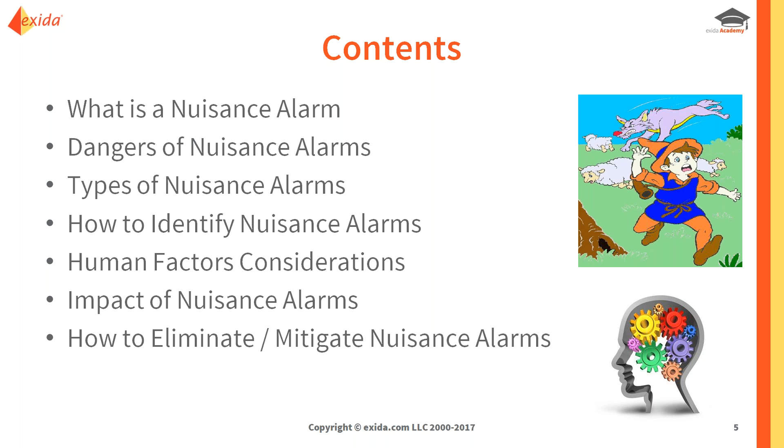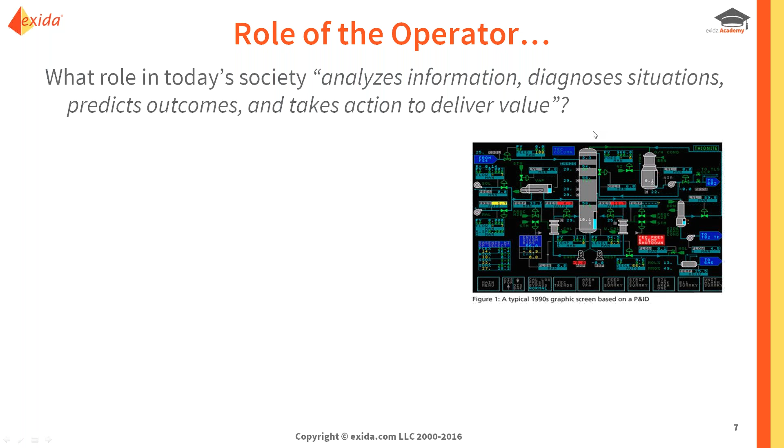On that note, we'll get started with a quiz question. I want you to think about what role in today's society analyzes information, diagnoses situations, predicts outcomes, and takes action to deliver value. Is it A, an airline pilot, B, a doctor, C, an air traffic controller, D, an operator, or E, all of the above?

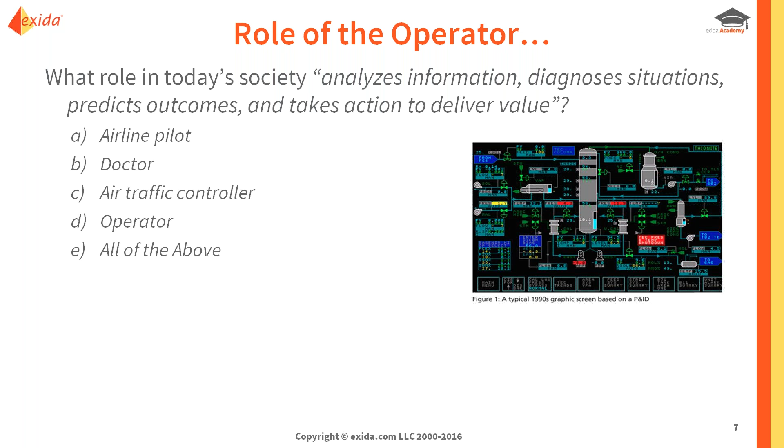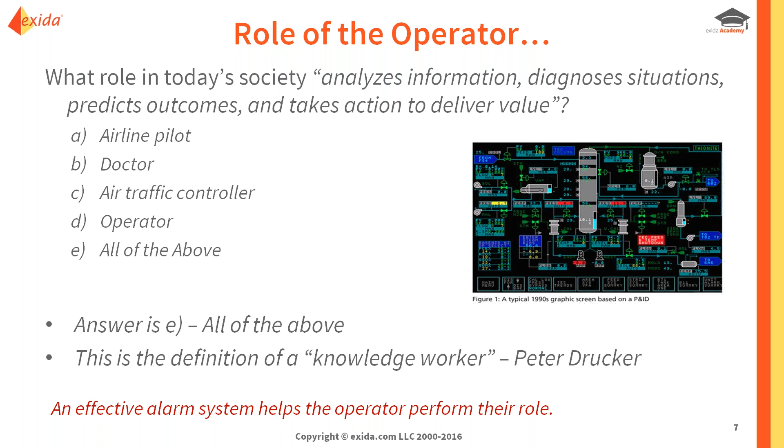As you can probably imagine, this was not really a serious question, but what I wanted you to realize is operators are similar in what they do and what they need to do as airline pilots, doctors, and air traffic controllers, in that they take in a lot of information and need to make quick decisions that may have significant impact on the operation of your plant. So they need to make quick decisions, and obviously they need the best information available to help them make those decisions. Having an effective alarm system working is key to helping them perform their role effectively.

Alarm system and alarms in particular. So let's look at what an alarm is actually supposed to do.

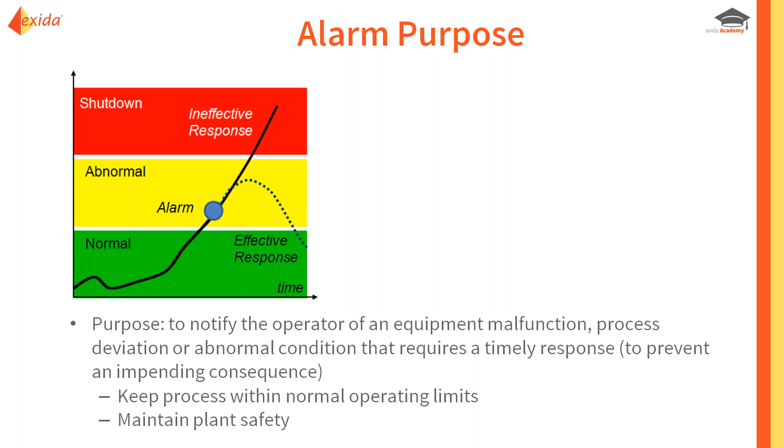But one of the key things was to see that when the alarm occurs and the operator responds, the situation will change and it will correct itself.

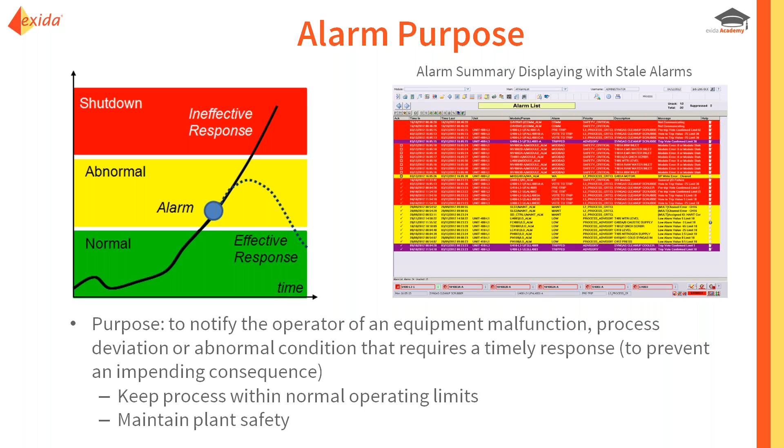So now if we look at a real-life operating plant where the operator's alarm summary display is full of alarms, and those alarms have been there a long time, days, weeks, months, we say those alarms that are on there, called stale alarms, are obviously not following the purpose we just talked about, which was: alarm occurs, operator responds, situation corrects itself, and the alarm clears. So these are examples of nuisance alarms, and there's something about them that they are not following what an alarm is supposed to be.

In other webinars, we've talked about the most common alarm management issues and how they impact operator performance. In this webinar, we're just going to focus on a subset of them, the nuisance alarms. So we'll look at chattering alarms, standing stale alarms, bad actors, and redundant alarms.

So we've been talking about a nuisance alarm, but let's define what it is. Everyone has kind of a general concept of what it would be, but let's look at the actual definition. A nuisance alarm is an alarm that annunciates excessively, unnecessarily, or does not return to normal after the correct response is taken. So what does that mean?

That means that, let's say we put in a new alarm into our system, and that alarm occurs, and the operator, if they've been trained on how to respond to it, which they should have been, will respond appropriately and take the corrective action and watch to see whether the alarm clears. Well, what if the alarm doesn't clear and that alarm just stays there and doesn't go away, but nothing happens? That would be an example of a nuisance alarm.

Well, what's going to happen the second time that alarm occurs? Is the operator going to respond the same way? Probably they will the second time, but how about the third and the fourth time? After a while, they will realize that it doesn't matter whether they respond or not. It doesn't make a difference. No consequence will occur. Nothing is happening different in the process. So thus the nuisance alarm.

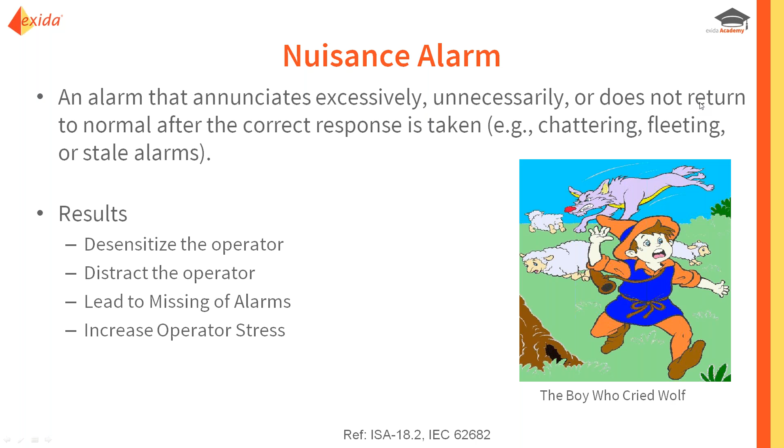So now let's take a look at that scenario, and I'm going to try to play a video here that we have created to help.

Looks like we're having some technical difficulty with the video, so we'll include that as a link in our distribution of the information. But essentially we're showing the analogy between the boy who cried wolf and nuisance alarms, alarms that go off expecting the operator to take action when there's no need for them to take action. After a while, they start to ignore those alarms. But at some point, there may be a scenario where those alarms should not have been ignored, just like when the wolf actually shows up, and you can have a problem because the operator has ignored the alarms. That's one of the reasons why dealing with nuisance alarms is such an important thing to do.

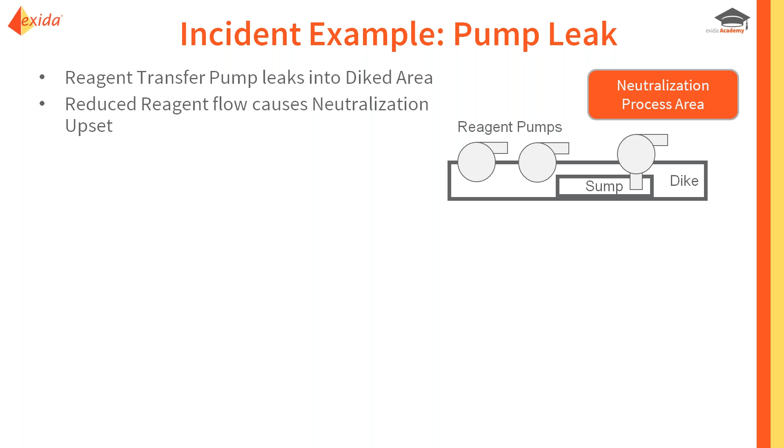Now, that was not just a hypothetical example. We'll look at how that plays out in the real world. This is an example from a chemical plant where we had a couple of reagent pumps that were transferring reagent into a neutralization area. Well, they developed a leak, and that leak was collected in a dike and into a sump.

At some point, the operator received a high-level alarm in the sump, and they ignored that alarm. Then they received a high-high alarm, and they ignored that as well because they were used to ignoring the high alarm.

They focused on what was going on in the neutralization area, which was the upset, and couldn't figure out how to address the situation because they were so focused there. They basically ignored what was happening from the reagent pumps and the sump, thinking that because it was a nuisance alarm and could be ignored, it didn't factor into the diagnosis or the corrective action. So the operator ignored it.

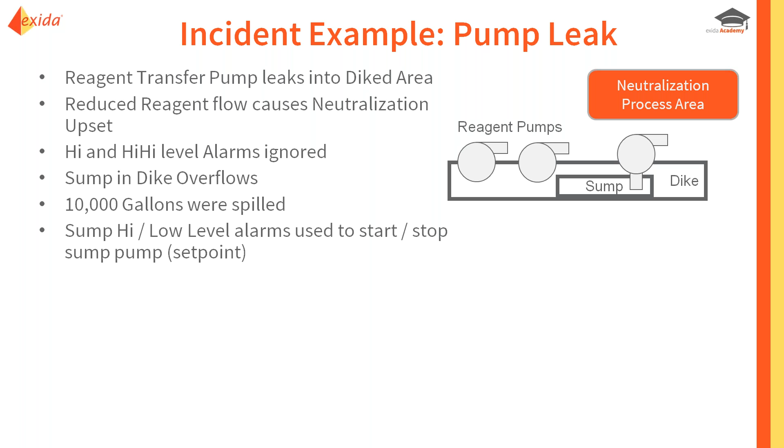Then the new operator came on shift. They did their walk around the grounds and saw that the sump had actually overflowed and spilled 10,000 gallons into the environment, all because the operator had ignored the high and high-high level alarms.

Part of the reason why they had done that was because those alarms—the high alarm was a nuisance alarm that occurred regularly because of the design, occurring every time the pump started. That alarm was tied to the set point for the level to automatically start the pump, so it was a nuisance alarm that the operator tolerated or ignored.

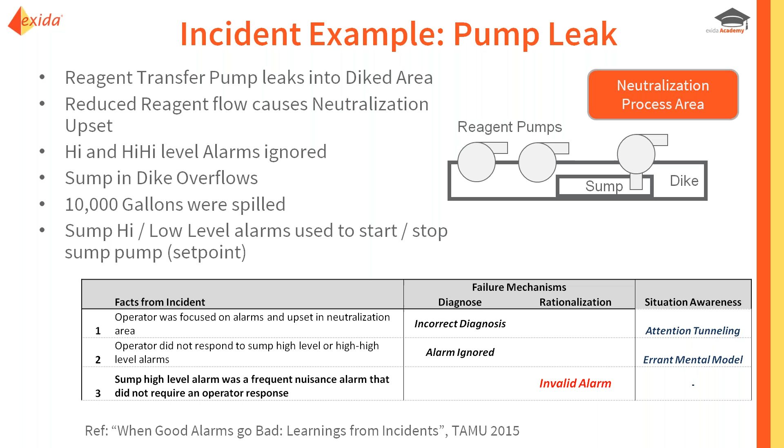Because of that, when the high-high alarm came from that same area, they were so used to ignoring the high alarm that they didn't realize it could indicate a different situation, and they thought it was still acceptable to ignore that. So that's actually an issue with nuisance alarms—operators developing a false sense of what is happening or what's important because of the presence of those nuisance alarms.

Let's talk about how we got into this situation, because the situation now with the modern DCS is probably more challenging than it was in the past, when there was limited real estate in your control room for alarms. There was a lot of thought put into what points should be alarmed, because they went up on the wall and were connected via wiring, and there was significant investment in wiring, cost, and setup to make that work. So there was a lot of thought put into what alarms were needed and why.

Fast forward to the modern DCS, where alarms are in software. They're essentially free—it seemingly doesn't take any action or thought to enable an alarm. And if you're not sure whether you need an alarm or not, most people would go ahead and think they would be safe by enabling the alarm. That is one of the precipitators for nuisance alarms, because we've configured alarms that we didn't really identify what they're supposed to be for. Maybe they're not for anything, and maybe they shouldn't be alarms in the first place. That is one of the main causes of nuisance alarms.

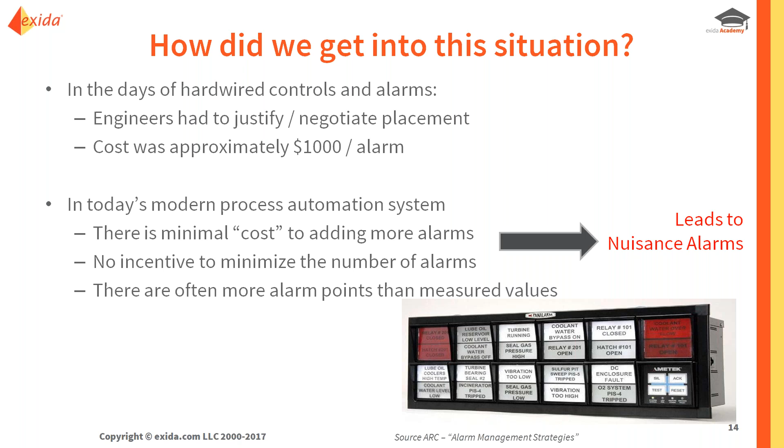Now, the way to get out of that is to go back to the thought process of the past, where we looked at every alarm from a critical point of view and said, what's the purpose of this alarm? What's the operator supposed to do? What's the consequence? We went through and made sure that each alarm had value for the operator, and there was some reason for it. That is a process called alarm rationalization, and that is key to helping eliminate nuisance alarms.

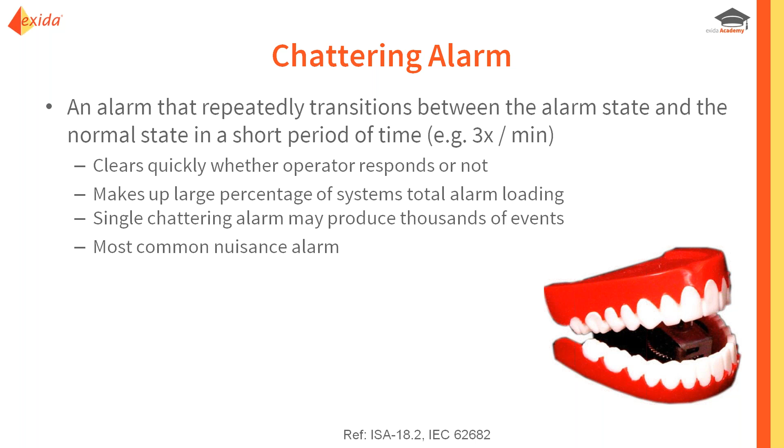Now let's talk about different types of nuisance alarms and how you identify them. One type is called a chattering alarm. These are alarms that occur with a high frequency, maybe 3 times in a minute—they go into alarm and then clear pretty quickly thereafter, maybe in alarm for only a couple of seconds. They clear before, or not as a result of, the operator's action. The operator may in fact not have even acknowledged the alarm or noticed it yet before it's already cleared. So you can end up with a lot of alarm events, and this can become a really significant annoyance to the operator, because not only is it a nuisance or false alarm, but the fact that it goes in and out of alarm so frequently can really create a point of confusion.

Another type of nuisance alarm is a fleeting alarm, similar to a chattering alarm, but it just does not immediately repeat.

One of the best ways to identify these types of nuisance alarms is through reporting software. In this example, we can see some of the modules, particularly the very first one, batch transfer line flow.

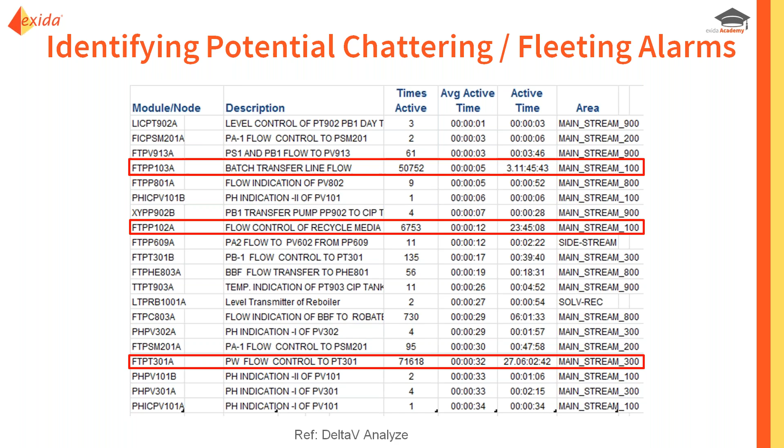That alarm actually occurred 50,000 times, and it was active for an average of 5 seconds. So that alarm is clearing, going into alarm and clearing 5 seconds later, obviously not having anything to do with what the operator is doing. But imagine if you had an alarm that occurred 50,000 times in a month - you're going to have your alarm horn going off constantly, and that's going to drive you crazy. So one of the reasons why you want to identify these alarms is so they can be fixed.

A standing alarm is an alarm that's in an active state. If it's active for more than 24 hours, an extended period of time, then we call it a stale alarm. These are the alarms that constantly are displayed on the alarm summary display that clog the display so there's always a bunch of alarms on there, making it much more difficult for the operator to detect a new alarm when it comes in. If you had a blank, clean screen of no alarms and you got a new alarm, it's much easier to see than if you have a screen that's already full of stale alarms and a new one comes in.

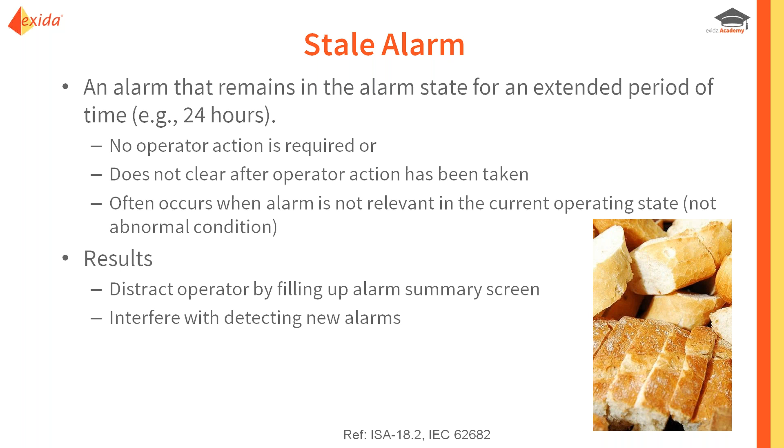These alarms can be challenging to get rid of because there's a lot of different reasons why they could occur. One might be that the alarm limit or alarm condition is not appropriate for the state of the process, in which case the alarm's not going to go away until that process state changes. So we'll talk about how to eliminate those.

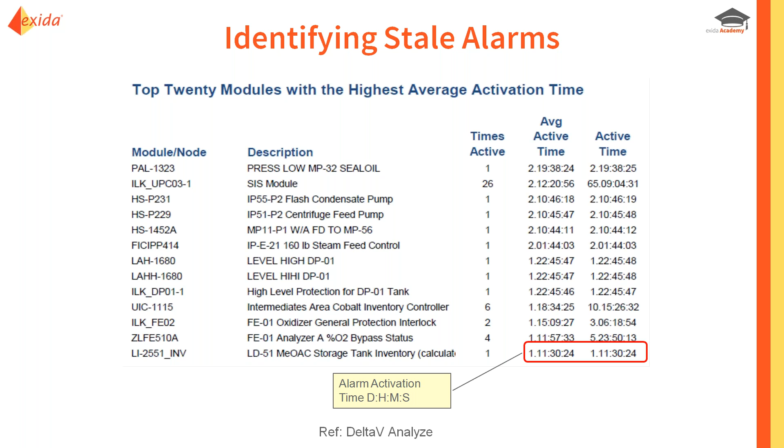We also want to use our reporting software to identify which are those stale alarms. Here we can look and see that we have a high-level interlock for a tank that's there for protection purposes that's been active for over a day. Now, it's a pretty dangerous situation if that's a safety rated interlock or has some safety functionality, because when the alarm is stale and active, it obviously can't re-annunciate to indicate that a problem has occurred. So it's almost as if the alarm doesn't exist or it's disabled because it's already active, so it can't re-annunciate to let you know that something has happened.

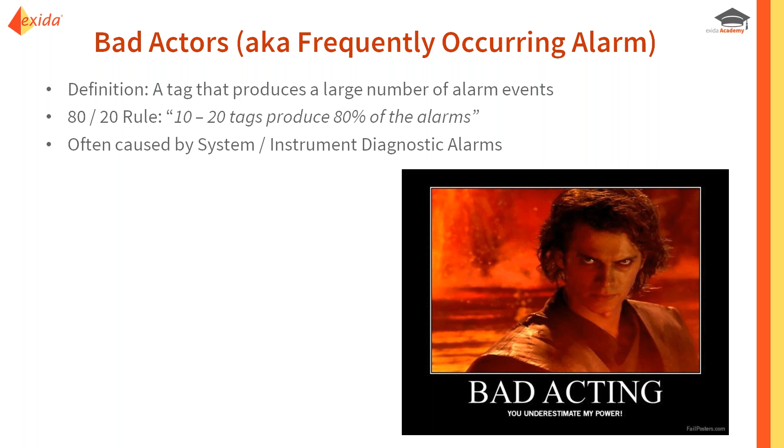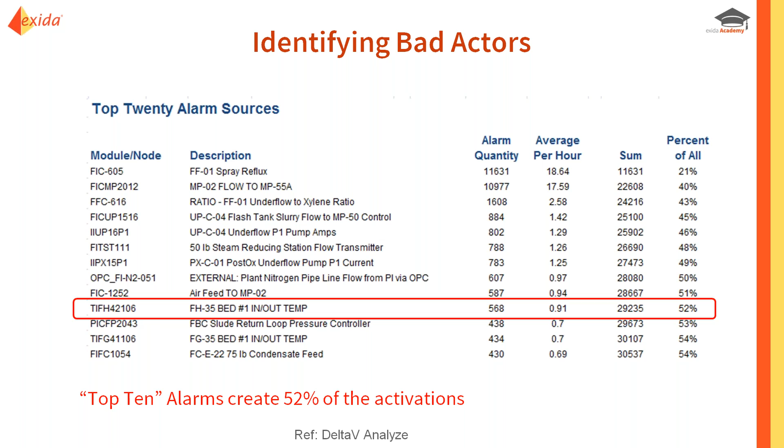Another type of nuisance alarm is called a bad actor, or frequently occurring alarm. If you look at an unrationalized alarm system, you'll typically find that there's maybe 10 to 20 alarms that produce the majority of the activations. In this example, we can see that the top 10 alarms in this system, which may have 10,000 configured alarms, create 52% of the activations - way more than you would think they should. So obviously we want to identify these bad actors so we can fix them.

Another type of nuisance alarm is a cascading or redundant alarm. You have an event that occurs, an interlock trip for example, that initiates a series of other events, which result in their own set of expected alarms. So we end up with redundant alarms - one event occurs, and we end up with 2, 3, 4, 10 alarms occurring, all basically indicating the same thing has happened. So we want to get rid of those as well.

The international standards on alarm management, both ISA 18.2 and IEC 62682, provide guidance on alarm system performance metrics, specifically related to nuisance alarms. Here we can see the recommended percentage of the top 10 bad actors is supposed to be on the order of 1 to 5%. So the example we saw, we were looking at 52%, which meant you've got work to do.

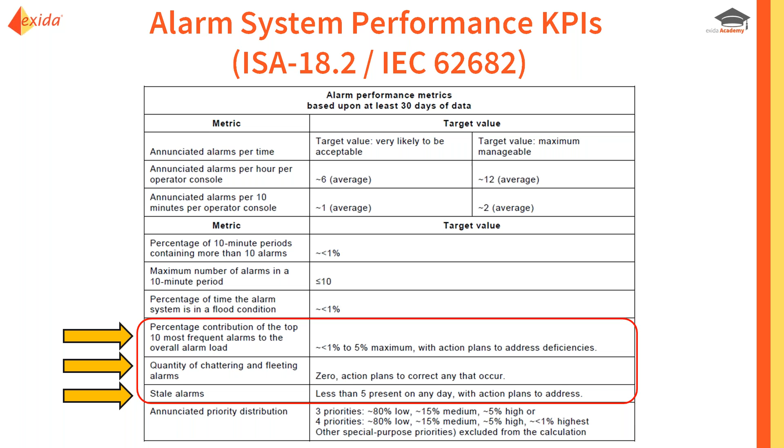The quantity of chattering and fleeting alarms ideally should be 0, and if you have some, you have plans to address or fix that. The number of stale alarms ideally less than 5, again with plans to address whatever's causing them. So you can see there are KPIs related to how to assess your nuisance alarm issues and how bad they are, to help you drive them to acceptable performance.

So now let's talk about human factors. The wild card in all this is the operator. If we think about how an operator responds to an alarm, modeled as discussed in the ISA and IEC standards, it really consists of 3 steps. First, the operator needs to detect that the alarm is there - they have to become aware of the alarm.

Then they need to diagnose what the problem is and figure out what has happened and what corrective action they should take. And then the last step is for them to actually take that corrective action in response to a deviation, hoping that will correct the problem. Now, if we look at those three steps, we can see that nuisance alarms have an impact in each and every one individually.

Stale alarms or chattering alarms will affect the ability for the operator to detect a new alarm. So as I mentioned earlier, if the alarm summary display is full of stale alarms, that will make it harder for the operator to detect that first step in the process, to detect a new alarm.

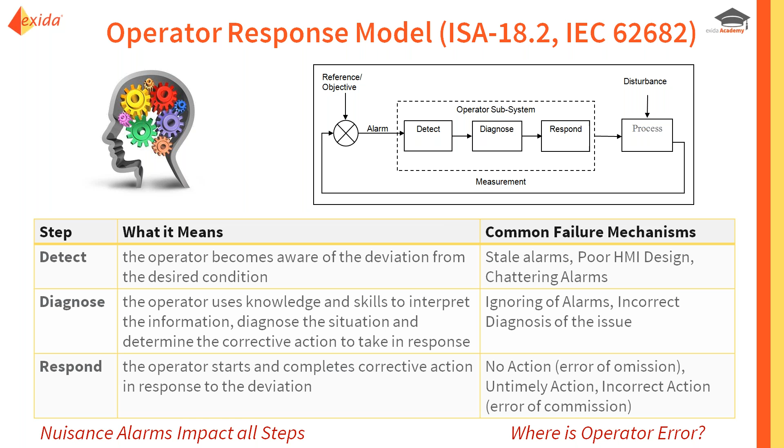But what I want you to think about is, is operator error really a thing? Is it really a valid explanation of what has happened or what is going on? If there are nuisance alarms impacting the ability of the operator to detect the alarm and then diagnose it correctly, wouldn't it be reasonable to think that their response may be incorrect or impacted because of the first two steps? I would think it would be. And we're going to talk about whether operator error is really a significant phenomenon here.

Now, situation awareness - nuisance alarms impact situation awareness. What is situation awareness? It's really the goal for the environment you want to have for the operator, to be able to live up to what we talked about earlier, that knowledge worker being able to take in external cues of what's happening, process data, HMI data, alarms, and understand what is happening, make sense of what's happening now, and project that out into the future so they know what they need to do to prevent situations from occurring.

So nuisance alarms can have a significant impact on the ability of the operator to have that situation awareness, because they don't know which of the external cues to rely on, which ones are correct to take action on, and which ones to ignore.

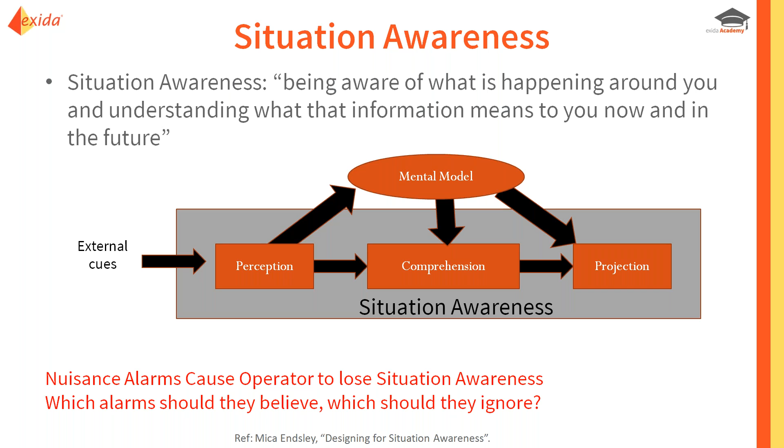So you can imagine, if you're trying to understand what's happening - if you were a doctor and you're getting incorrect temperature readings when taking the temperature of a patient - that's going to really make it hard for you to figure out what the problem is, because you don't know which of your external cues you can count on and which ones are not correct.

So now let's look a little bit at signal detection theory and alarms and relate that to human behavior. We see two Gaussian distributions there showing signal detection and noise. For an operator to detect an alarm, that's the signal, that's the valid alarm case. The noise case is the false alarm or the nuisance alarm.

Ideally, we want to have those peaks be as far apart as possible. That would make it easiest, from a signal detection theory standpoint, for the operator to distinguish the alarm. Now, when we talk about noise in this context, we don't necessarily mean audio noise - we mean noise in the environment, so it could be visual. For example, if red is the color you use for alarms, but you are also using red for the status of your pumps or process piping, you have now created noise that will make it harder for the operator to detect that new alarm.

Now, the fact that these plots overlap, you can see there's an area where you have the possibility of both a false alarm and a true alarm, where it's up to the operator to decide whether the alarm is valid or a false alarm. The further apart we make those two peaks, the smaller that area is.

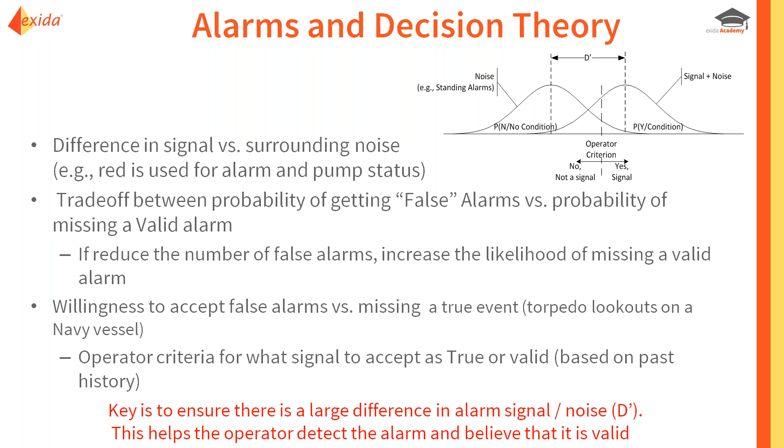In many cases it's based on past history. So if you have an operator who has been operating the plant and gets a lot of nuisance alarms, that gets factored into their thinking, thought process, and behavior for when a new alarm comes in. They've been conditioned based on past history to expect a lot of nuisance alarms. So how does that drive their behavior?

Some human performance studies showed that if you have a 25% false alarm rate—a false alarm being one the operator doesn't need to respond to, not really requiring their action—that's significant enough that the operator will stop relying on the alarm system for detection of abnormal events. And 25% is not that high.

Other studies have shown that it really needs to be 5% or less to have the integrity where the operator will rely on the alarm system and investigate every nuisance alarm as you'd like them to. But to do that, your false alarm or nuisance alarm rate needs to be pretty low, 5% or less.

Another key piece of information from those studies is the operator's confidence in a particular alarm that occurs. So let's say you have a new alarm—what does the operator think of that? Do they think it's valid immediately, or possibly a false alarm, or likely a nuisance alarm?

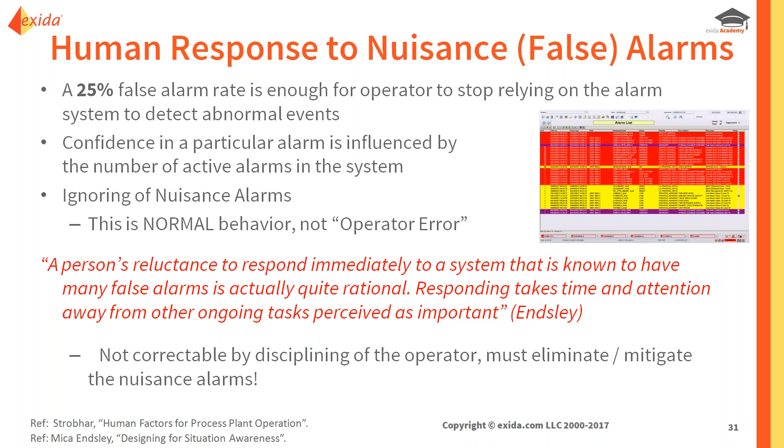Now, it's not like the operator is sitting there with nothing to do—their job is to optimize the process in the plant, so they have plenty of other things to worry about. The ability to ignore a nuisance alarm allows them to focus on more important tasks, which is actually what you'd want an operator to do. So the way you correct the operator's behavior of ignoring alarms is not by disciplining them, it's by eliminating or mitigating the nuisance alarms.

Now let's look at that impact on safety and operator reliability. Let's say we've done a layer of protection analysis and we have a safety alarm we're counting on to provide some level of risk reduction—a risk reduction factor of 0.9, such as recommended by CCPS. That means its probability of failure on demand is also 0.1, so 10% of the time.

Well, let's look at a couple of what-if scenarios. What if that alarm we're looking at for risk reduction is actually a nuisance alarm?

How likely is it that the operator is going to respond correctly? That's the first scenario. How about the second scenario? What if the overall system has a lot of nuisance alarms, and this one good safety alarm is lost in the flood of other nuisance alarms? How likely do you think it is that the operator is going to respond correctly and appropriately?

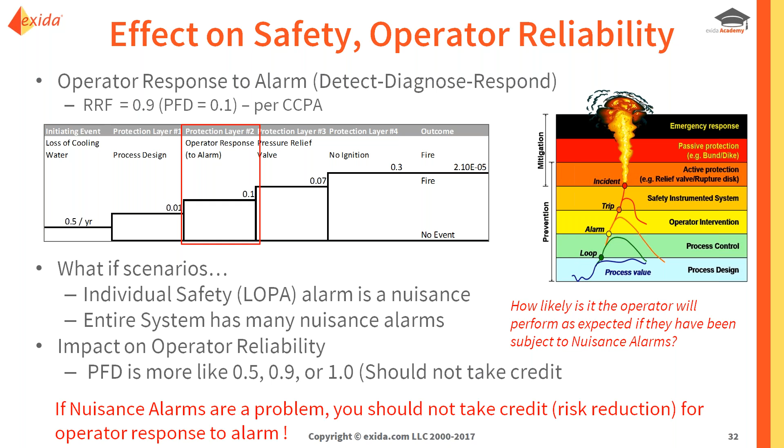Probably not. So in reality, if you have nuisance alarms, whether it's for the particular safety alarm you're looking at or the system overall, chances are your probability of failure on demand is going to be much higher than 0.1. It would be more like 0.5, 0.9, or maybe 1, and you should not take credit for that alarm. So if nuisance alarms are a problem, you should really consider not taking credit for a risk reduction for those alarms. So now let's shift to how we eliminate nuisance alarms.

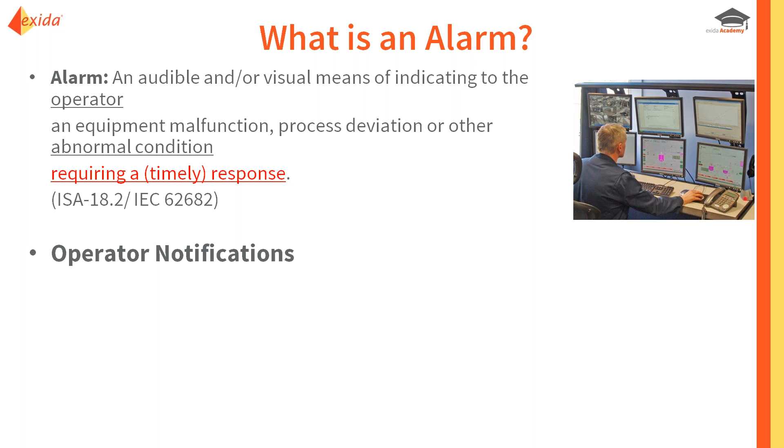The ISA standards and the IEC standard define what an alarm is supposed to be. Our rationalization process, which we'll talk about shortly, is a way to make sure that every alarm that is configured matches this definition, meaning it's for the operator, indicates an abnormal condition, and requires a timely response. One of the other things that factors into that is thinking about all the operator notifications, some of which truly require operator action and represent an abnormal condition.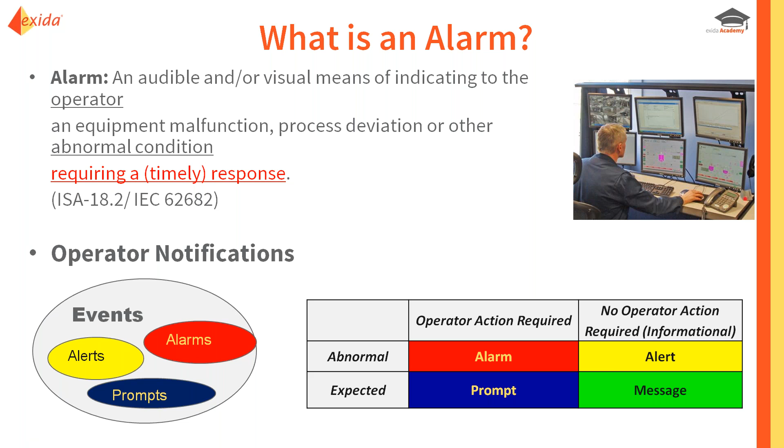Those are true alarms. We want to differentiate these non-alarm notifications though, because those might be what we're calling nuisance alarms. We may have a situation where there's an abnormal event and we're telling the operator about it, but there's no corrective action required. Well, that's not really an alarm. We can call it an alert. The purpose of categorizing it is so we can separate those notifications out of the summary displays for alarms. So those are no longer nuisance alarms. They're still valid information, they're just not alarms, and we want to present them separately.

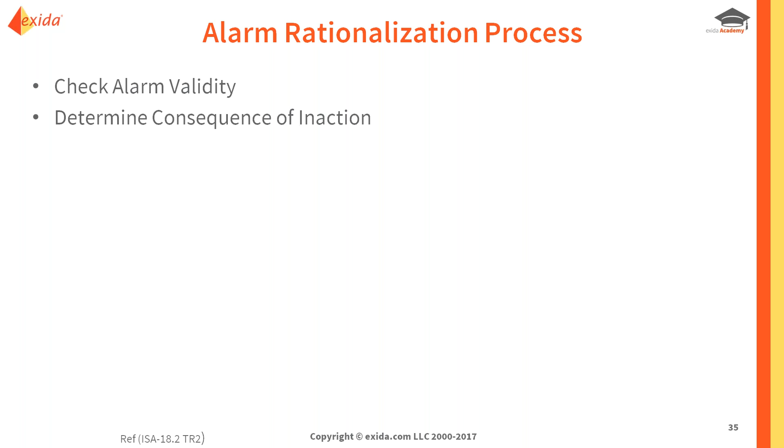But the main way to correct nuisance alarms from an alarm management point of view is to go through the alarm rationalization process, a series of steps: checking the alarm validity, assessing the consequence, cause, confirmation, corrective action, operator response time. Those are the first things you look at, the key ones to get rid of nuisance alarms.

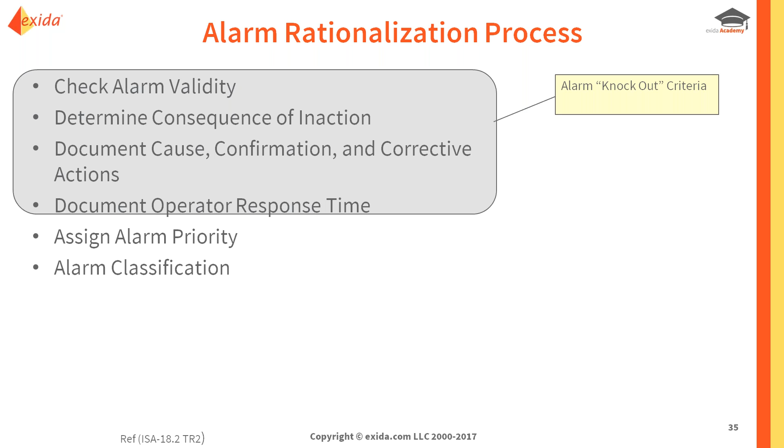Then there are other steps in the rationalization process once you've determined it's a valid alarm. Our SILAlarm tool will actually guide you through the rationalization process and help you make the appropriate decisions as to whether something is a nuisance alarm or not. The way you start is with some criteria, which you can pull from the definition of an alarm.

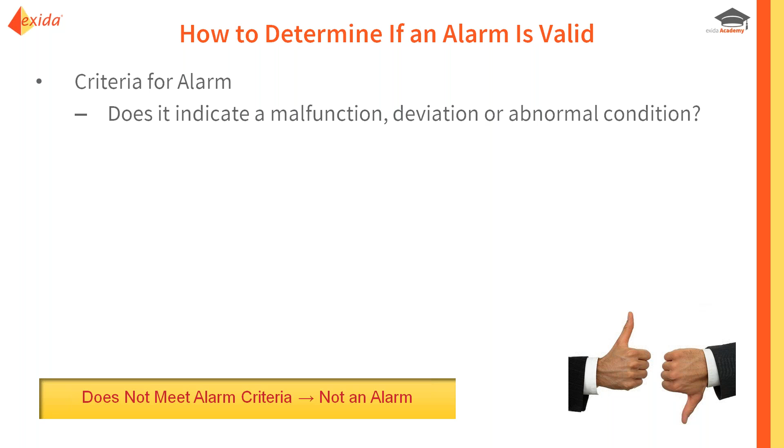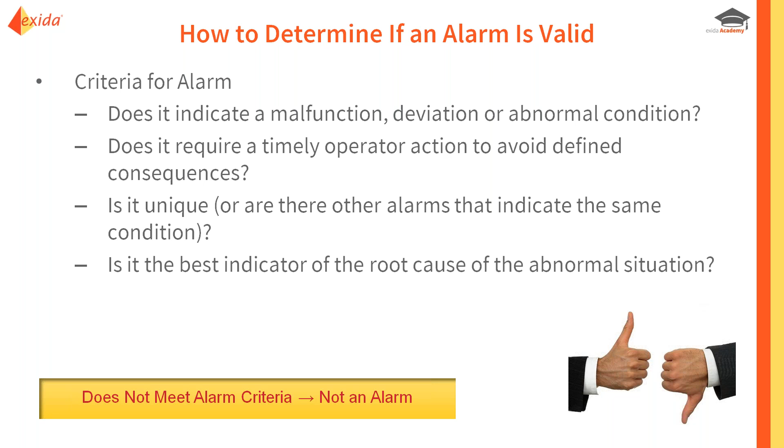For a given alarm, we ask: does this alarm indicate a malfunction, deviation, or abnormal condition? Yes or no? If you can't answer yes, it likely should not be an alarm. Second, does it require a timely operator action to avoid defined consequences? Again, if you can't answer yes, it should not be an alarm. There are other criteria as well: is it unique? Is it the best indicator? We can apply that criteria quickly to assess whether it's a valid alarm requiring additional consideration, or whether it should be removed as an alarm and maybe recategorized as an alert or something else.

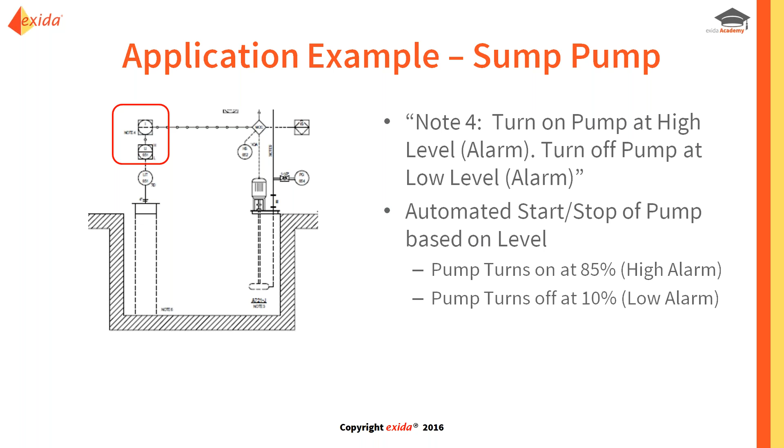So here's an example of applying that to our sump pump situation, the same one from the video, the same one from the incident. As required by the design, the sump pump will automatically turn on when the level reaches 85%, which is also the high alarm limit, and automatically turn off when the level reaches 10%, which is also the low alarm limit.

So if we apply our alarm rationalization criteria to this and look at the high alarm, the one causing the nuisance alarm in this scenario, we ask first: does this alarm indicate an abnormal condition? The answer is no, it doesn't. It's really indicating that the level has gotten high enough that the pump needs to turn on, and that the pump is turning on. So it's really a notification of an event.

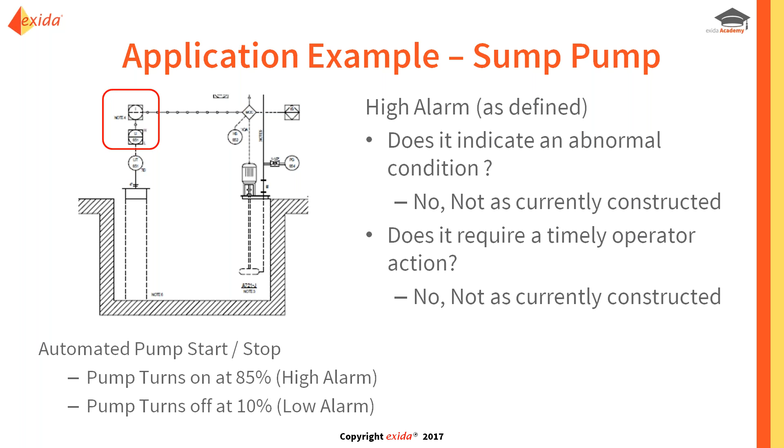Does it require a timely operator action? No, it doesn't, again. There's nothing the operator needs to do. That high alarm is really just indicating that the pump is turning on. So thinking back to the overflow scenario we talked about, this is why the operator was ignoring that high alarm - because there was nothing for them to do, and it didn't indicate an abnormal situation. So it really should not have been an alarm at all.

So now let's apply the next steps of the rationalization process: identifying what the likely cause of the alarm would be, identifying what the potential consequences would be - the direct consequence, what would happen if the operator didn't take their corrective action, not the consequence if all layers of protection failed.

We also want to define the corrective action. These are actions that will essentially correct the situation. So just acknowledging the alarm or general troubleshooting probably do not count as corrective actions. We want to talk about what needs to be done to fix the situation.

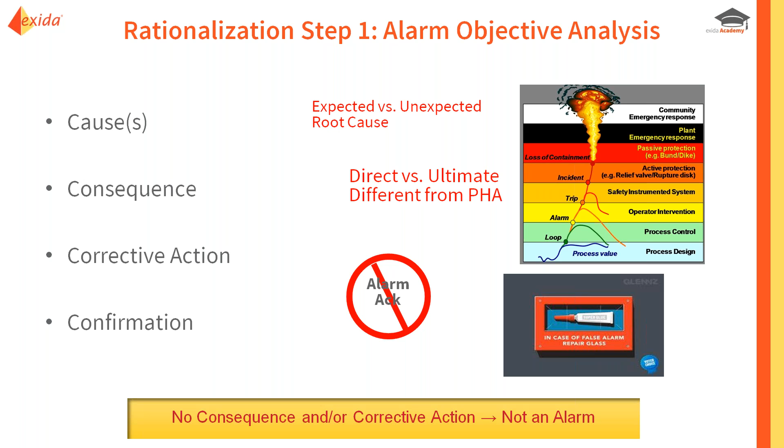And a new one to consider is confirmation. How can the operator verify that the alarm is not false? More details on that shortly. But the idea would be, if we can't identify what the consequence is, or the only consequence is another alarm occurring, or there's no corrective action, then again it likely should not be an alarm.

Now, confirmation. This is not something that classically people identify or document during rationalization, but it's something to think about including going forward in your rationalization process. And why is that? It's because if operators have developed a mentality of ignoring alarms because they're nuisance alarms, then by providing confirmation information, which is essentially the ability to cross-check, that allows the operator to determine for themselves whether it is a false alarm or a real alarm.

So for example, if you had a high pressure in a reactor and the operator wasn't sure whether that was a real alarm, thought it could be a nuisance, what could they do? Well, they could look for other pressure measurements. What if there are other sensors? Or they could look at the temperature to get a feel for whether that alarm is likely real. So it's very important to provide information to the operator to be able to confirm that the alarm is real.

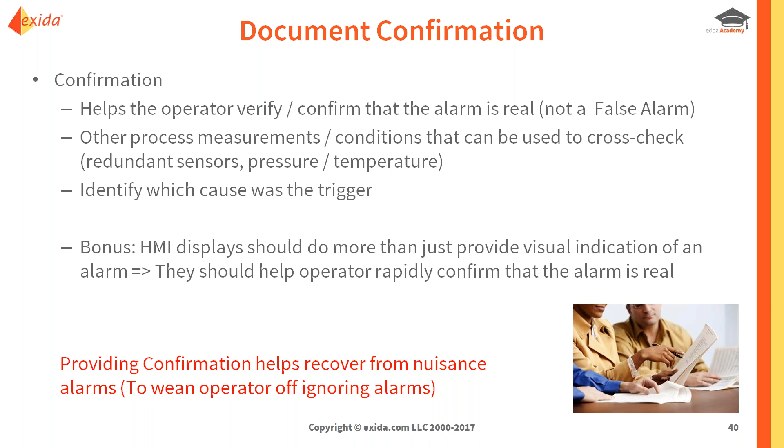And that's really not just during the rationalization process. That should actually be thought about during the HMI design process as well. We want the visual displays to make it easy for the operator to quickly confirm that an alarm is real or not. Providing this confirmation is one of the keys to wean the operator off of the behavior of ignoring alarms. If you provide them auxiliary information so that they can decide themselves whether it's a false alarm or not, then you will increase the likelihood that they will respond to that alarm.

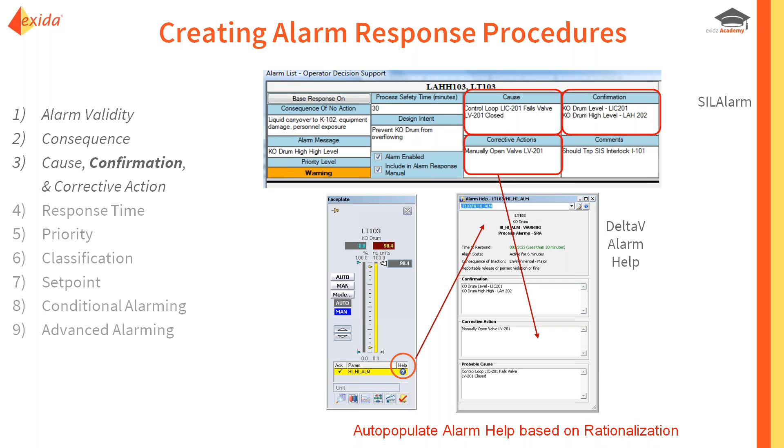During the rationalization process, we will capture all that information. If you're using our SILAlarm tool, we can extract that information and create alarm response procedures, which would show the operator what points they could look at to confirm that the alarm is real. A good operator would likely know what process points are related. No process variable changes unto itself without influencing other process variables in a connected process. So a good operator would likely know how they're interrelated, but documenting that information and making it available for the operator when that alarm occurs can be helpful as well, particularly for new operators.

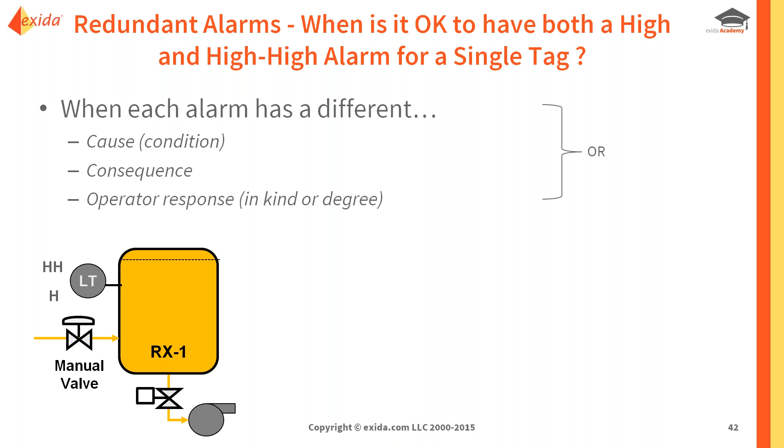So one of the common questions is how to eliminate redundant alarms, a type of nuisance alarm. How do we determine when it's okay to have both a high and a high-high alarm for a single tag? As we went through and analyzed what it takes to be an alarm - cause, consequence, corrective action - the criteria we can develop is that something about the two alarms needs to be different. So either the cause needs to be different, the consequence needs to be different, or the corrective action, the operator response, needs to be different in kind or degree.

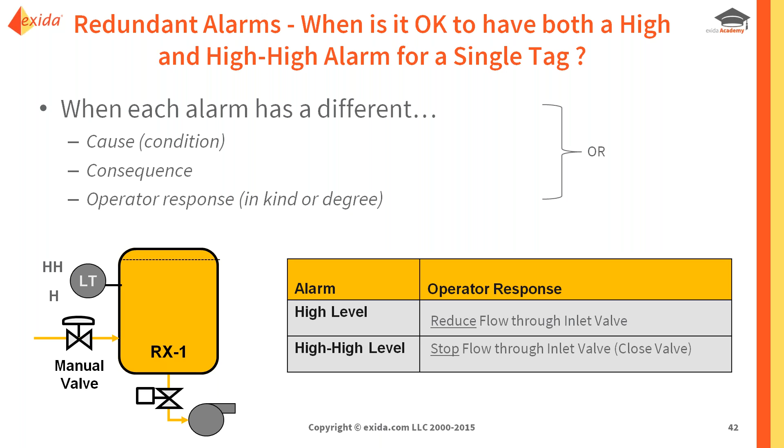And what I mean there is, if you look at this tank example where we're going to get a high level: if the operator's range of corrective actions relate to just the manual valve, then when the high level alarm first occurs, the operator response could be to reduce the flow in that manual valve. And then if the level continues to increase, causing the high-high level alarm to occur, then at that point they would stop the flow. So this would count as two different valid corrective actions because they are different in kind or degree.

Now, one of the other causes of nuisance alarms is just not setting the alarm limit correctly. So if we look at the alarm set point, we are essentially trying to set it somewhere between your normal operating scenarios and the consequence that you are trying to prevent. So let's say we're looking at pressure, and the consequence is lifting of a relief valve. If we can define what that setting is, then we want to set the alarm limit somewhere in between the normal operating envelope and that PRV setting.

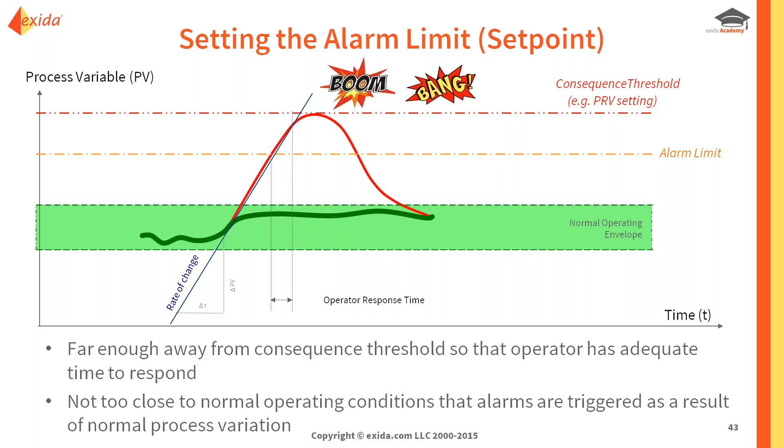But on the other hand, if you're too close to the consequence threshold preventing nuisance alarms, your operator won't have sufficient time to respond to prevent the consequence. So it requires some thought to balance the need to prevent nuisance alarms versus making sure the operator has sufficient time to respond. We need to set the alarm limit correctly.

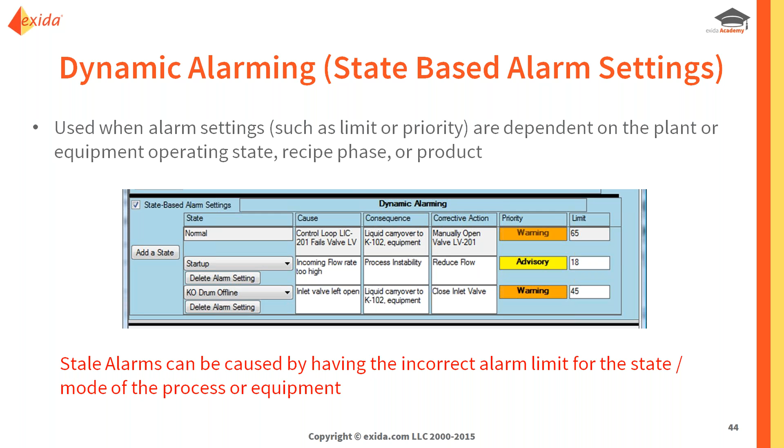Now, we may find that the alarm limit actually needs to be different depending upon the state of the process, and this is a common cause of stale alarms. If we are running at different rates, or during a startup or shutdown phase, the alarm limit may need to be different. One way to eliminate stale alarms is to define dynamic alarming, essentially the ability to have the alarm have a different limit depending upon the state of the process.

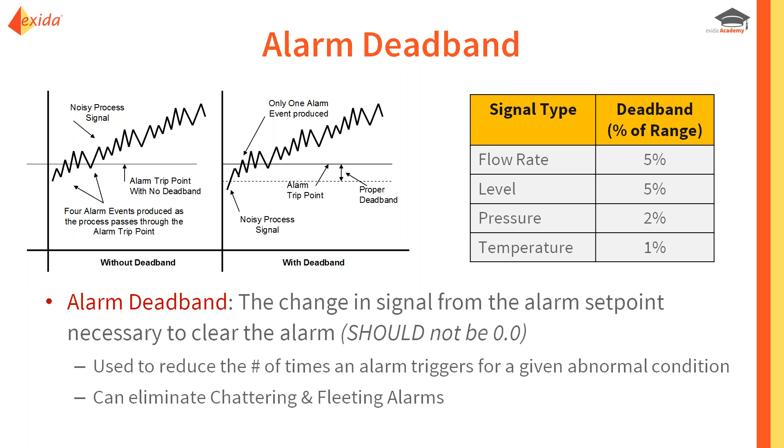So the way to buffer that or smooth that out is by the application of an alarm deadband, which presents a range that the process variable needs to go through to clear before the alarm would essentially be eliminated from being shown to the operator. This will reduce the number of times the alarm is annunciated, and that's essentially how we get rid of chattering alarms. There are recommended values defined in the ISA standard, ANSI/ISA 18.2. It's probably best to consider these as upper guidelines to apply based on understanding the process and seeing which alarms you're having problems with, before applying them as a blanket default.

So let's look at how deadband actually influences an alarm. Let's say we've got a pressure situation. We have a pressure indicator that's scaled from 0 to 100 PSIG, and we have a high alarm set at 90. So the limit is 90, and we have a deadband at 2%. As soon as the pressure goes above 90%, that's when the alarm is triggered. Any fluctuations between 88 and 90 do not cause the alarm to clear. The alarm will not clear until it drops all the way below 88. So that's the example of how to eliminate a chattering alarm.

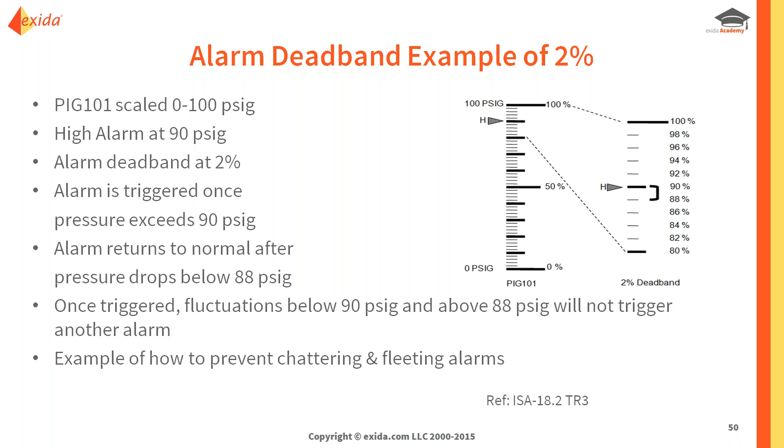Now, if you set the deadband too wide or too big, sometimes purposely or unknowingly or by mistake, then you can end up with the scenario where the alarm occurs and it never clears because the process variable doesn't drop down low enough. There's one example of a customer I was working with where the operators knew that when they looked at the alarm summary display, they had some stale alarms they could see, and they knew what the actual value was and what the trip point was, or the alarm limit. Sometimes they knew when it got close but not completely cleared that the only way to clear that alarm was to temporarily go in and change the deadband to 0 so the alarm would essentially be cleared, then set it back to what it was supposed to be. So in this case, they were correcting stale alarms by momentarily changing the deadband to 0 and then back to the initial value, probably because the deadband was set too big, too large.

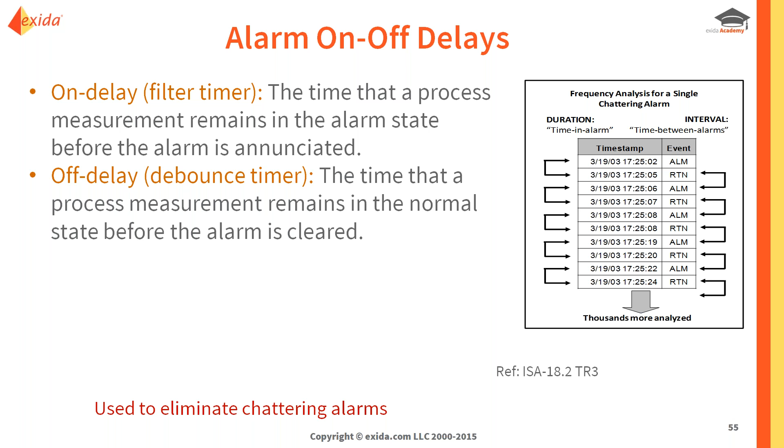Alarm on and off delays are other ways to eliminate nuisance alarms. These delays can be put in to control the annunciation or clearing of the alarm, forcing the alarm to be in a true condition or false condition for a certain period of time before making that change. That's another way to eliminate chattering alarms, and it can be applied to both analog and digital alarms, not just digital. There's actually language in the standards now saying every control system is supposed to provide deadband and on-off delay capabilities within the alarm system, because these are so important for eliminating nuisance alarms. When it comes to implementation, deadband is typically the most powerful, so that would be applied first. On-delay would be applied next, and that can eliminate chattering and fleeting alarms.

You do have to be mindful of the fact that you are delaying the notification of the alarm to the operator. So if you were implementing something with a significant on delay of maybe 30 or 60 seconds, but the operator had less than 5 minutes to respond, as part of your rationalization process you determined that, then you're robbing the operator of a lot of potential response time. That would not be a good design situation.

Off delay is then the least powerful one to use, and that's what you would use after deadband and on delay. Now, there was a study done by ASM, the Abnormal Situation Management Consortium, for some plants in the UK, and they found just by tweaking these parameters, on delays, off delays, and deadbands, that they could reduce the number of alarms the operator saw by 45 to 90%. And if they're reducing alarm instances by that, chances are most of those alarms were nuisance alarms.

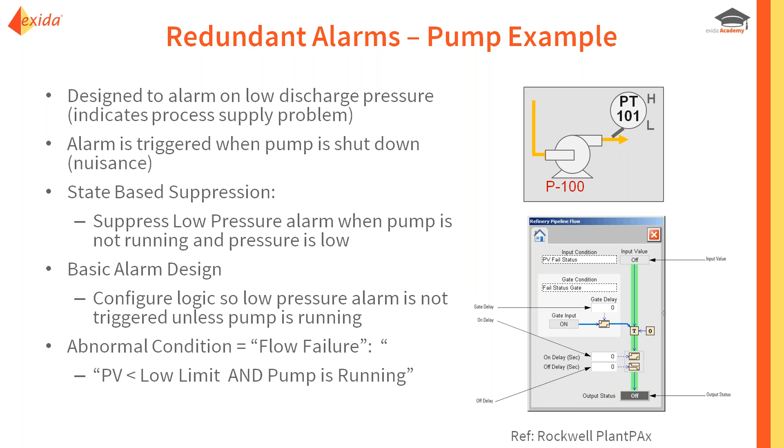Another way to eliminate redundant alarms is to think about scenarios where you have one alarm occurring and it causes another alarm because of the way the equipment interacts. Example: a pump where we have a low discharge pressure alarm that will go off anytime the pump is stopped, so we could end up with that as a nuisance alarm. Instead of alarming off of just the pump's discharge pressure value, we would want to incorporate into the alarm processing the fact that the pump is running as well. So we create a smart alarm that says pump pressure must be less than X and the pump must be running. This is a way to eliminate that nuisance alarm and the redundant alarm of pump has failed and we have a low discharge pressure alarm, because we would know those two are related.

So now, summarizing, what are the benefits of doing rationalization? We said that was key to eliminating nuisance alarms. If you go through that rationalization process correctly, it will help you eliminate or minimize nuisance alarms. Now, we talked earlier about the wild card here, the human factors, the operator's response, the operator's behavior.

Just eliminating the nuisance alarms in your system may not be enough by itself to change the operator's behavior. So how do we shift the operator's reliance on the alarm system? Well, they should be taking part in the rationalization process. As they see that nuisance alarms or redundant alarms are being eliminated, they will hopefully realize that from now on, when an alarm occurs, they need to respond at that point in time, because they're not going to get a second, third, or fourth notification of that condition. So that will help change their thinking related to alarms in the system.

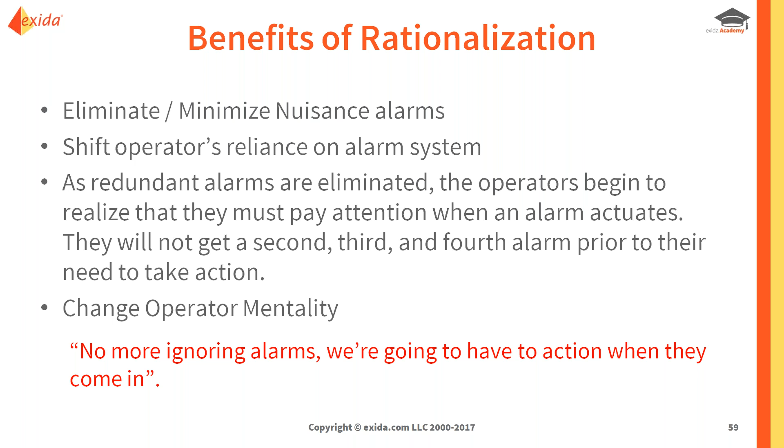So if they've gotten to a point where they are discrediting or not valuing the alarms from the system, taking part in rationalization and realizing for themselves that those nuisance alarms are being eliminated will factor into their behavior and changing their behavior of when they need to respond. A very common comment coming out of rationalization from operators is, hey, we're not going to be able to ignore alarms anymore. Every alarm that's left is actionable, so we're going to have to take action as soon as that alarm comes in. So rationalization and operator involvement in that process is key to changing the operator's behavior or mentality.

Now, you may not be able to prevent all nuisance alarm scenarios, so another key tool is to provide the ability for the operator to shelve the alarm. This is a mechanism where the operator suppresses the alarm temporarily, so the alarm disappears from their view for a fixed period of time. It's different from disabling it, because if you disable an alarm, it's gone forever unless you re-enable it. If you shelve an alarm, it's suppressed for a certain period of time, but it's not lost, it's on a different display, and it will come back after that period of time is over.

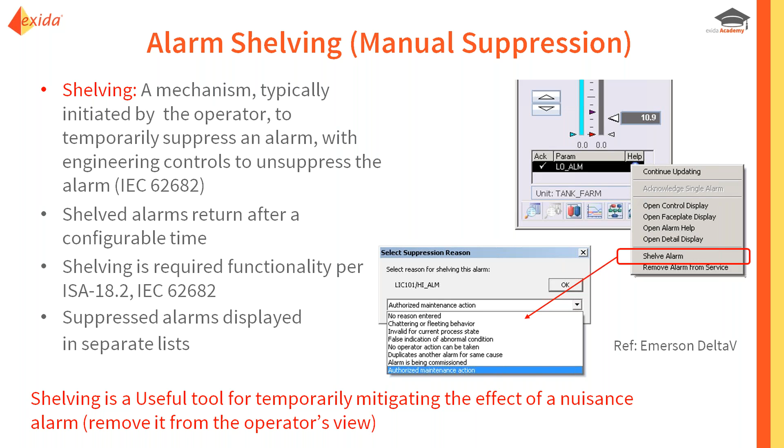Shelving is actually a required functionality per the IEC and ISA standards because of its importance in dealing with nuisance alarms. You can't prevent all nuisance alarms, so to help the operator deal with, for example, a chattering alarm, the best way is to provide them the ability to shelve that alarm or temporarily suppress it when they know it is a nuisance alarm. To make sure they're doing that under the right scenarios appropriately, you can have them document why they're doing it, and you should also be reviewing the list of shelved alarms to make sure it's being done for the right reason.

And that also is an indicator of alarms that need to be fixed. So in summary of what we've looked at, if you have nuisance alarms in your system, operators will ignore those alarms. This is normal human behavior, and it's to be expected.

Now, to change this behavior requires a number of steps. First, you need to identify which alarms are the nuisance alarms so that you can get rid of them. Measuring the performance and identifying your problem alarms is a key first step.

Then from a remediation point of view, you want to perform alarm rationalization. That'll weed out the alarms that don't belong, hopefully eliminate the nuisance alarms, and it allows you to identify the confirmation—what do I look at to validate or confirm that this alarm is real. So it's information that the operator can use themselves to make the decision about responding to the alarm. It's important to wean them off of the behavior of ignoring alarms.

Second key step in remediation is application of deadbands and on-off delays. We also want to evaluate the alarm limit, make sure it's set correctly, and consider whether that limit needs to be different depending upon the state of the process. Dynamic alarming may be required to eliminate those types of nuisance alarms.

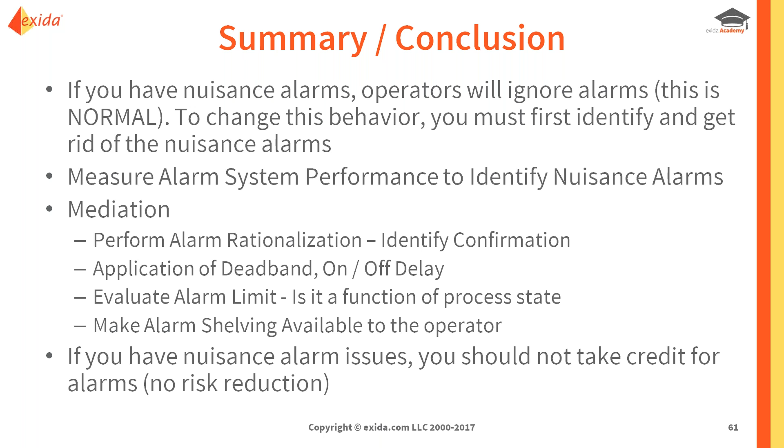And last but not least, if you have nuisance alarm issues—whether for a particular alarm you're taking risk reduction for, or the whole overall system—you should really reconsider using alarms for risk reduction unless or until you eliminate those nuisance alarms and get to the performance metrics we talked about earlier that were defined in the ISA standard.